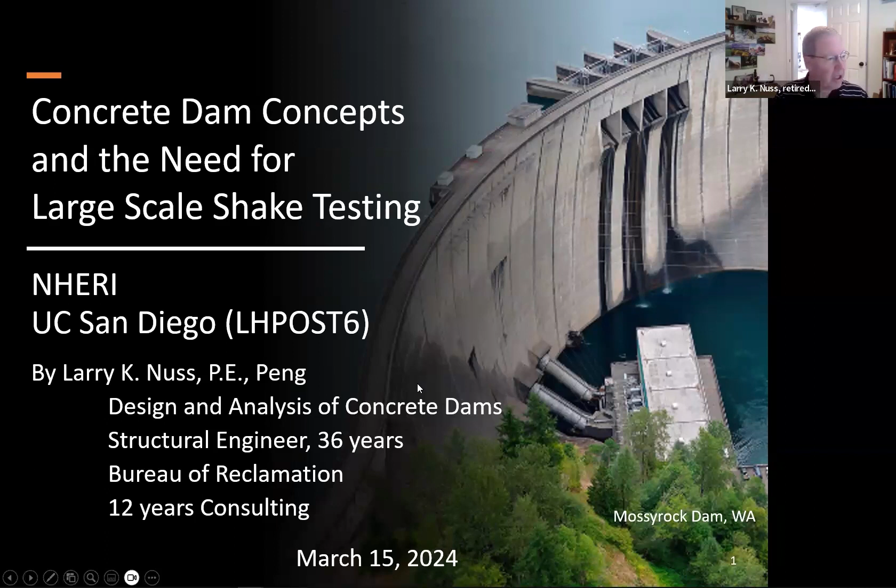You may not know this, but in the United States there's over 84,000 dams. There are about 3,771 federal dams and almost 45,000 private dams. The issue with seismic analysis of dams is that the downstream consequences could be enormous from the failure of a concrete dam. I'll show some failures that have occurred early in the last century.

But concrete dams have failed, but not from earthquake shaking. They failed from flooding, from overtopping, from landslides, and it's mainly due to failures in the foundation. So we have not experienced a seismic failure of a concrete dam. The Shih-Kang Dam in Taiwan was damaged pretty bad, and I'll show you a picture of that.

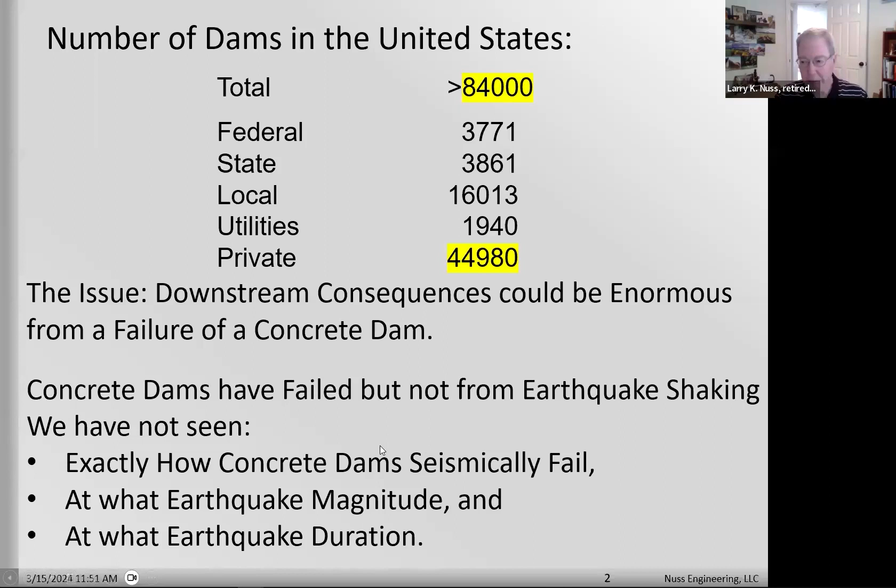But from purely seismic shaking, a concrete dam has not failed. So we don't know exactly. We've analyzed and done computer modeling of concrete dams, and we're basing a lot of our assumptions on analysis. But the reason we'd like to do a large scale test is to actually physically see a concrete dam fail. We've done small, like 3-foot high models, which I'll show some videos of, but nothing of any size. We'd like to see what earthquake magnitude they might fail at, and the duration.

Some of the subduction zone earthquakes are quite long. Concrete dams come in all different shapes and sizes, but there are 3 basic types: gravity dams, arch dams, and buttress dams. And I'll show you those.

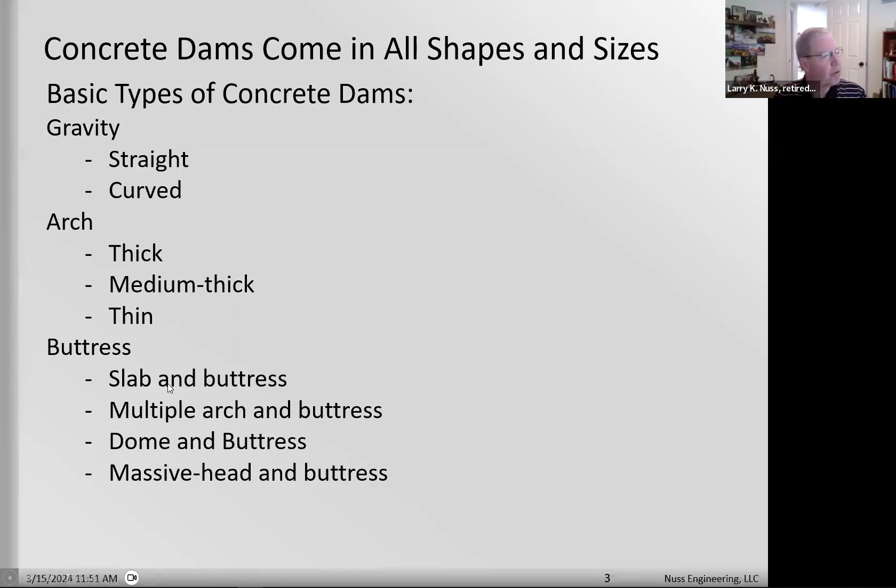So here's at the Bureau of Reclamation. Reclamation has 385 dams in the Western United States, about 90 of those are concrete dams. Reclamation is noted for having some of the largest in the world. Hoover Dam was built by the Bureau of Reclamation in the 1930s. It's 726 feet tall, so it's almost the height of a 72-story building.

You can see it's massive, and if you've ever been out there, it's worth the trip to go see Hoover Dam. Then there's Glen Canyon upstream from Hoover, which is 710 feet high. Here's Morrow Point Dam in Colorado, quite thin and narrow. And then look at East Canyon Dam, pencil thin, and it's 260 feet high.

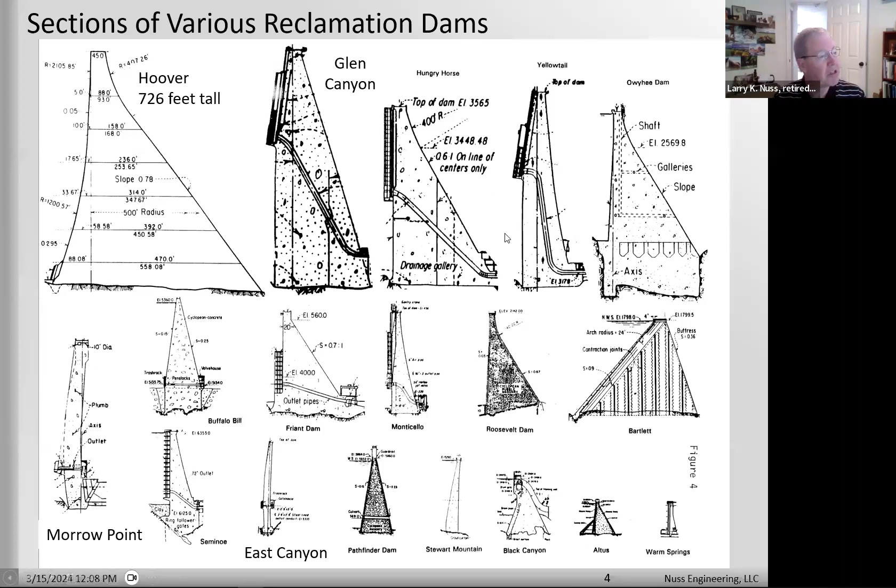So why are some dams very thick and some dams very narrow? We'll show you why. The main reason is the type, and a lot of it depends on the curvature of the dam.

Here's Hoover Dam right in the middle. It's curved, and so it develops a lot of its stability from just the curvature, like an eggshell. Then here's Friant Dam near Fresno, California. It's a straight dam across the canyon.

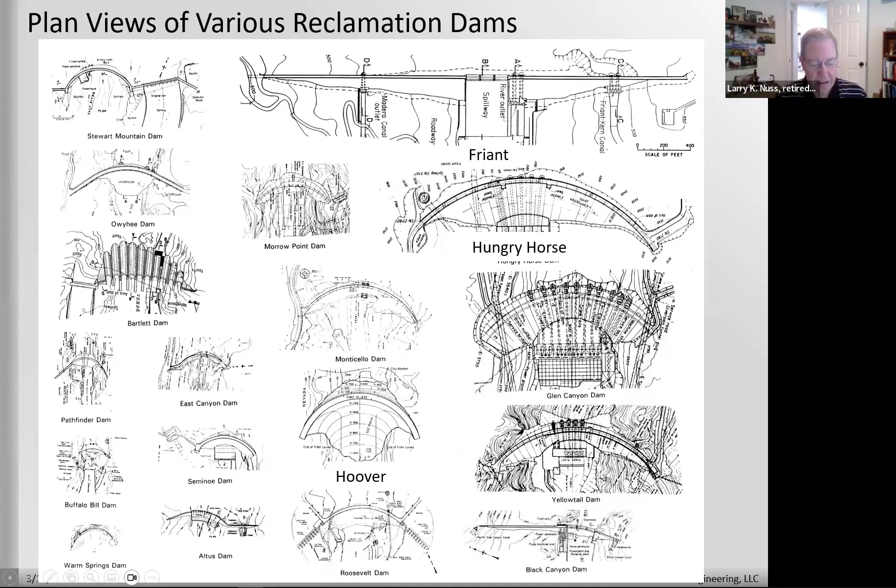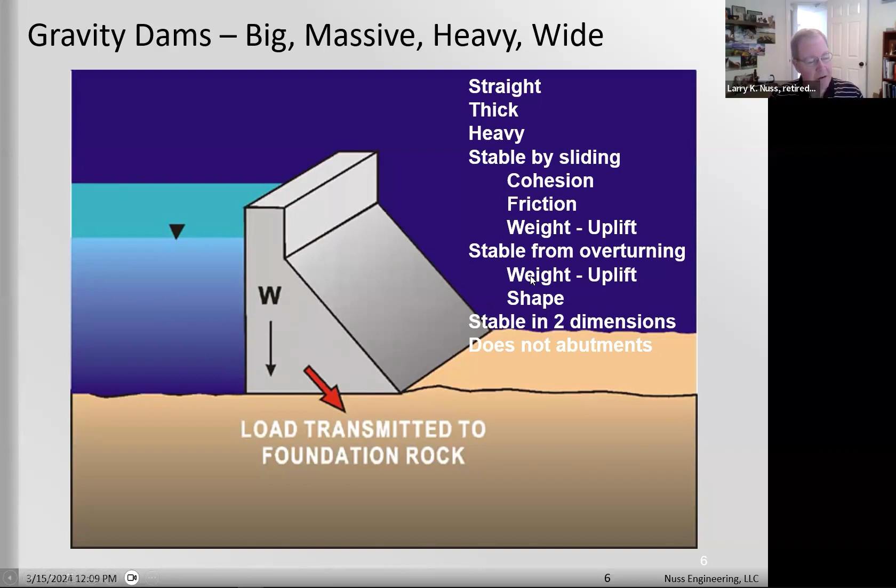Gravity dams can be straight across the canyon, and they're held there by their sheer weight. They're big, massive, heavy, wide, and just the weight of the structure makes it stable. You can think of the reservoir load as a triangle trying to push the dam downstream, and the weight of the dam, the concrete, is holding it in place. The forces from the reservoir are sliding it along the base and pushing it downstream. One thing about a gravity dam is they can be straight across the canyon, and they can be very, very wide.

Here's some pictures of a couple of gravity dams. Here's Grand Coulee Dam in Washington, almost a mile long. You can see it's stable—it's not getting any help from the abutments. It's so long, and it's just being held there by its weight.

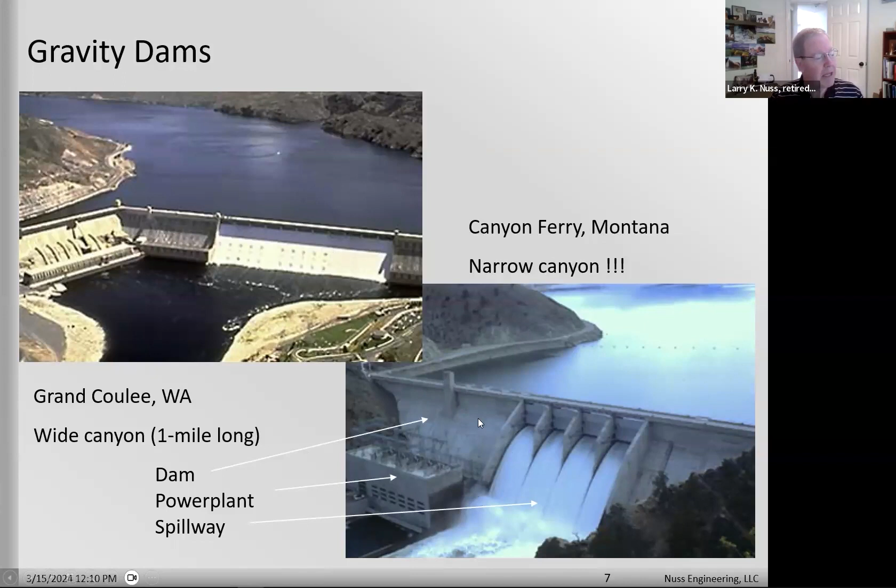Here's Canyon Ferry Dam in Montana. It's a gravity dam, straight across the canyon, also held there by its weight. It's in a narrow canyon, so it does develop some 3-dimensional beam action, but basically it's stable because of its weight.

Then there's buttress dams. There was a period of time when materials were hard to get, concrete or cement was hard to get, maybe the aggregates for concrete. So what designers did was narrow out, or hollow out, a gravity dam, and then to make it stable, since they're taking away a lot of weight...

The upstream face of the dam is sloped underneath the water, so you have all this weight of the water above the upstream face. That adds to the weight that's missing where they've taken it out. So buttress dams are stable because of their shape and their design, and they're very efficient because they're hollowed out.

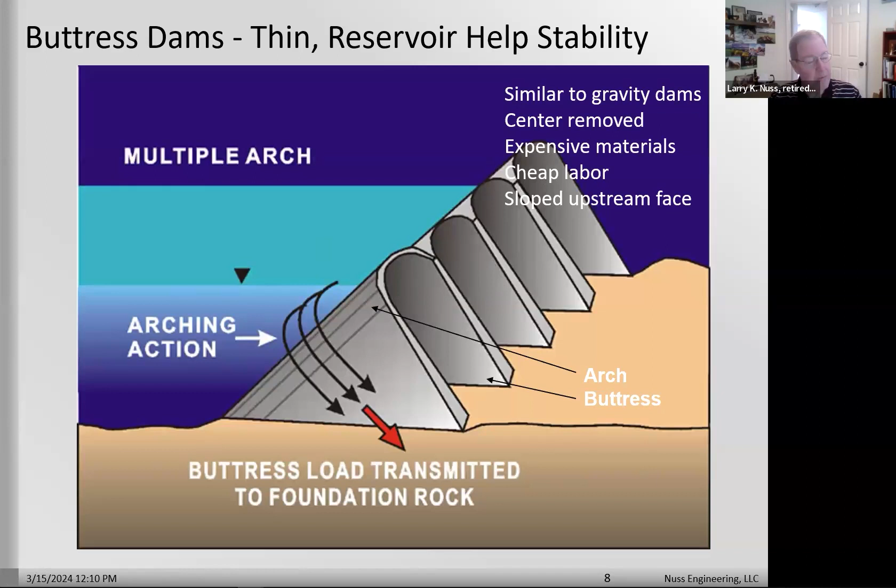One thing about buttress dams is you have to have reinforcement. So these are reinforced—gravity dams are not reinforced, and arch dams are not reinforced. Here's an example of some buttress dams.

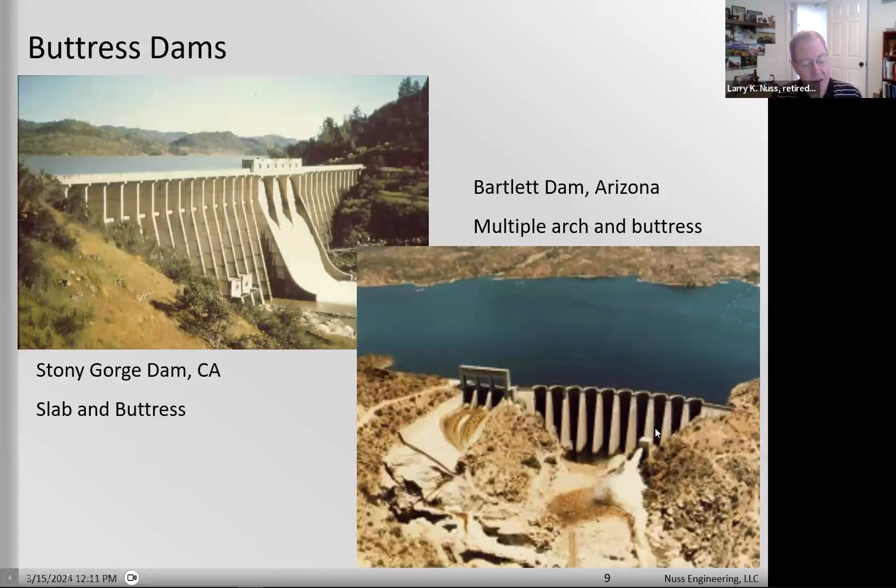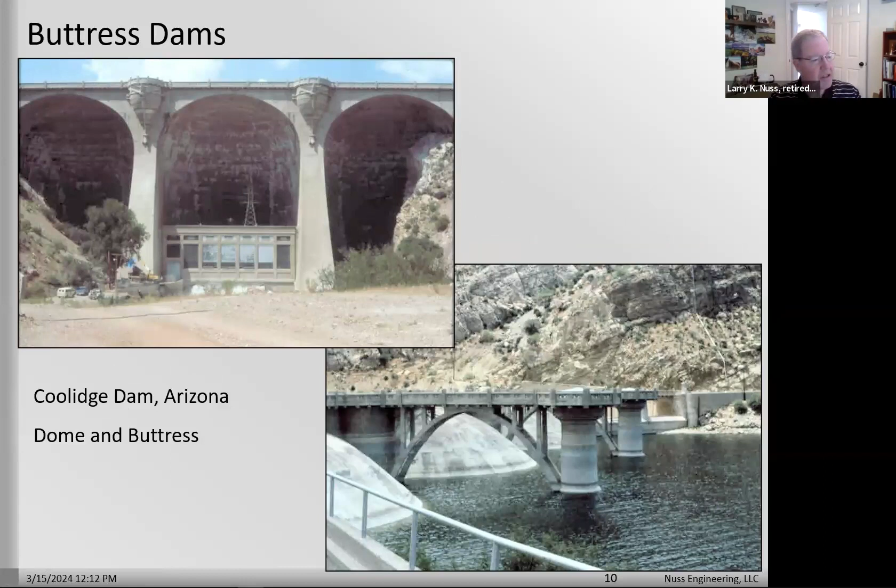And here's a buttress dam, Coolidge Dam in Arizona, and it has these three big domes, which are the upstream water barrier, and these domes carry the water load sideways into the buttresses. So there's a lot of different shapes and designs—there's no one standard concrete dam.

Then arch dams are thin, elegant, and carry the load very efficiently, with all the load going horizontally. It's like an eggshell—if you ever take an egg, put it in your hand without a ring on, and squeeze it, it's almost impossible to break just by squeezing, because shells are so efficient. Arch dams have to be in narrow canyons, and they have to have very strong rock abutments so the load can be transferred horizontally into the abutment.

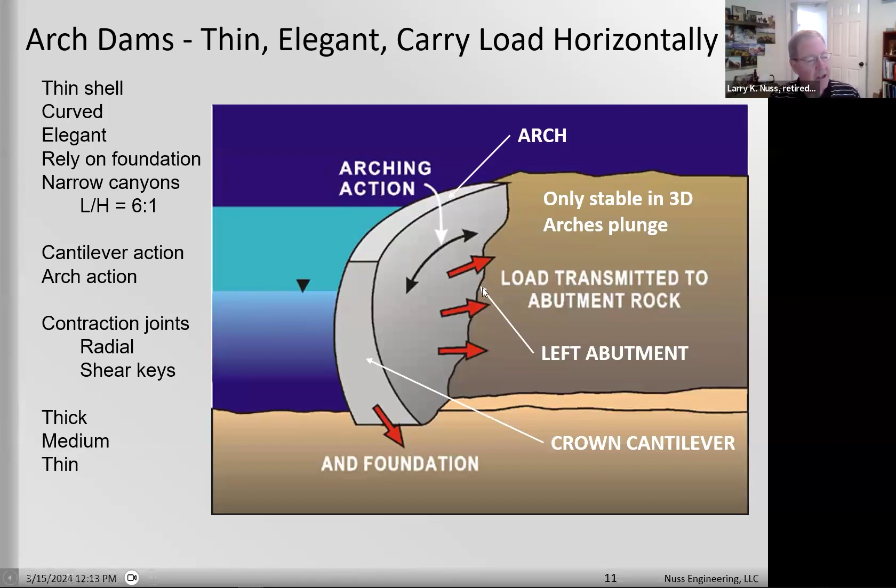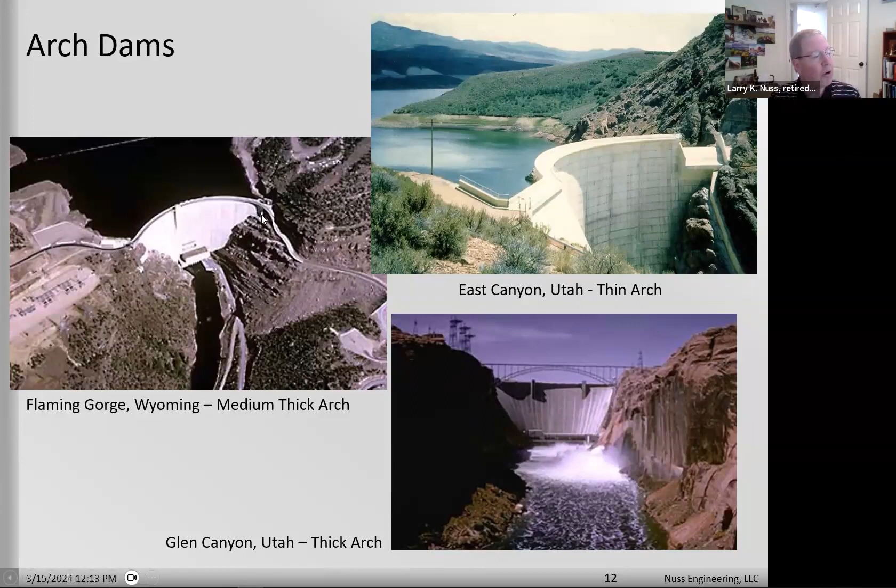And then here's Glen Canyon, 710 feet high. So you can see they're all in fairly narrow canyons, which is a requirement.

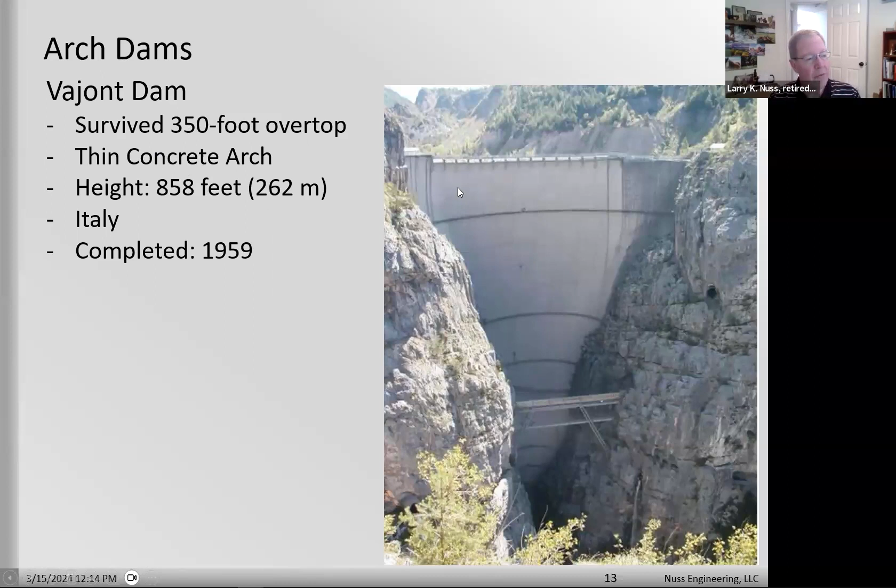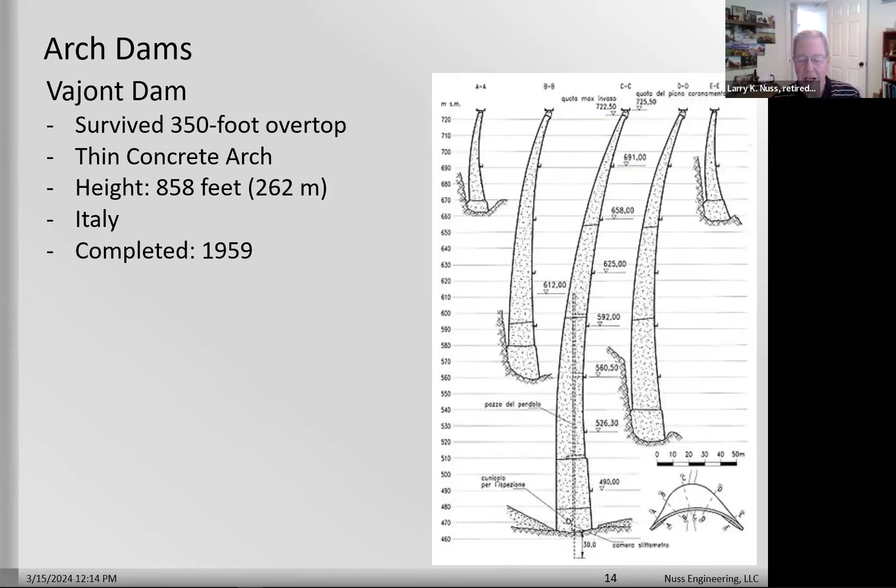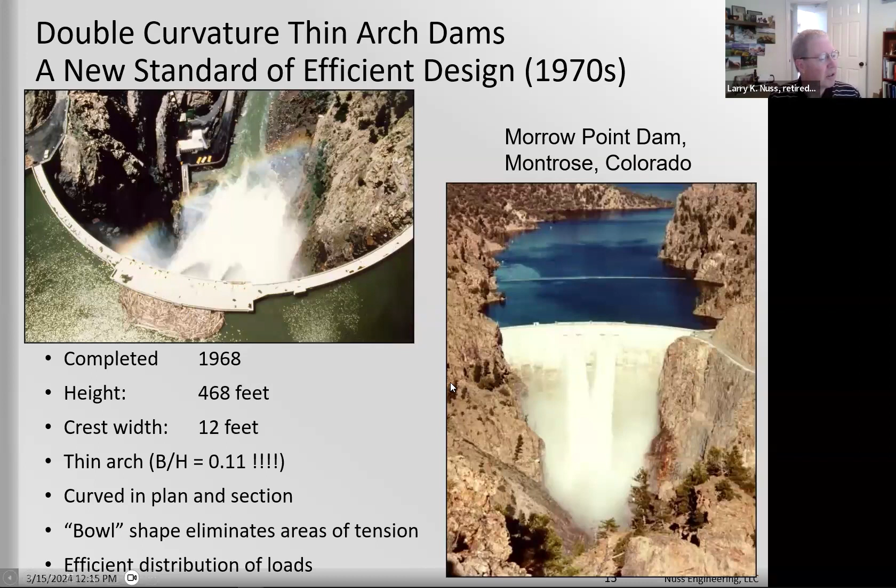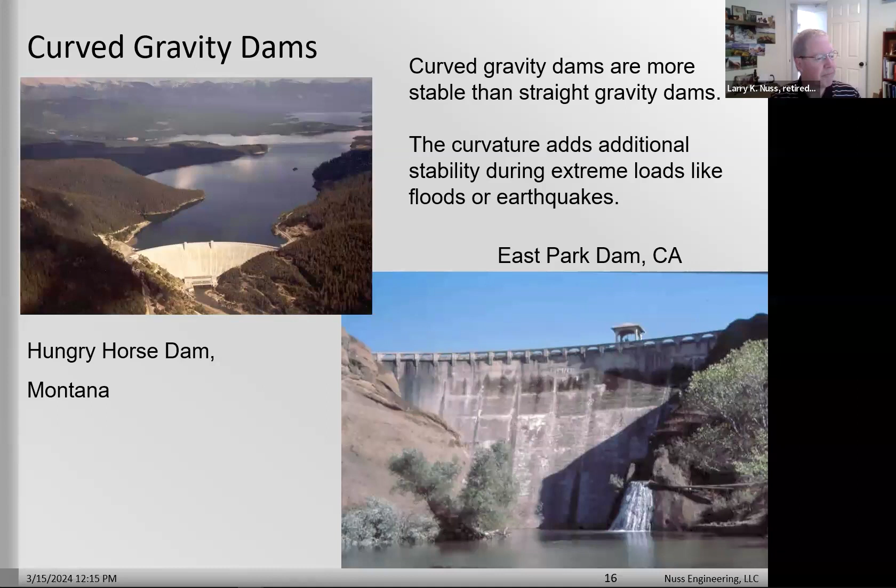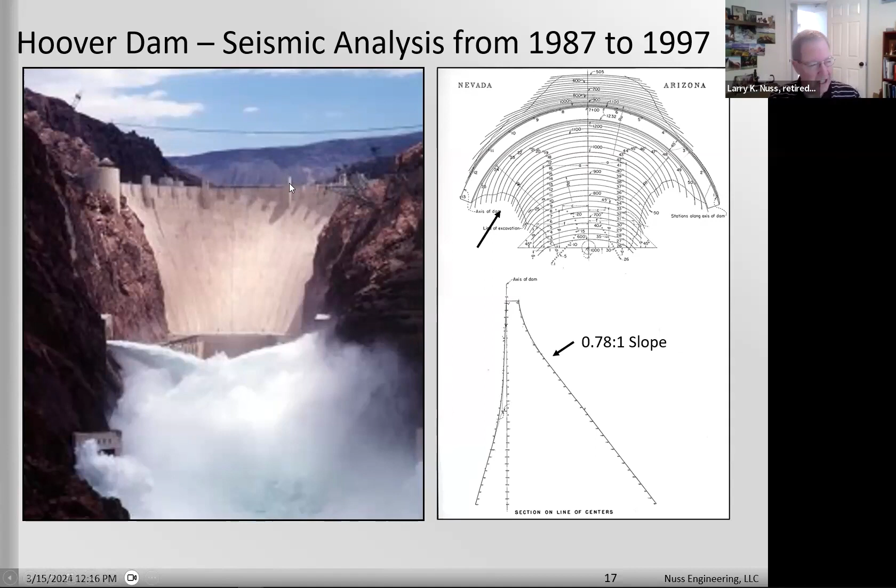Hoover's interesting. We reanalyzed that in the 1980s, and the peak ground acceleration at the base of Hoover, the Mead Slope fault is only about a half a mile away, and it generates about 0.6, 0.7 G at the base. And because this is so tall, the accelerations at the top of the dam are almost 3 G. So that means that if an earthquake hits, you're being pushed sideways at 3 times your weight. And the interesting thing is that these little towers on top of the dam are decorative, but they're also the men's and women's restrooms on top of the dam for the tourists that come to the site. So I said, well, if an earthquake hits at Hoover, you better not be up in those towers because there's going to be a lot of shaking up there.

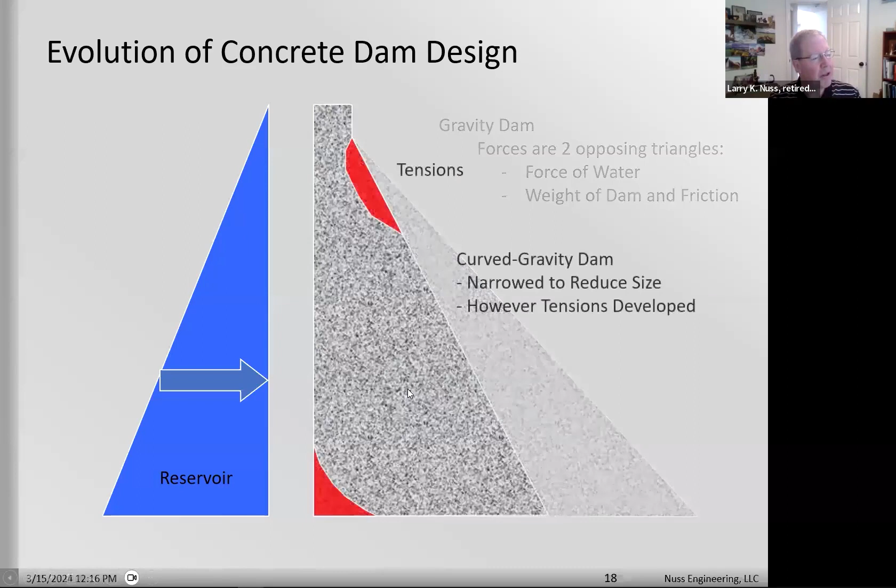So as concrete dams evolved, basically all concrete dams were gravity dams, heavy like this, and then they started making them thinner and curving them. And when you have a cantilever like this, you expect the dam to curve and to develop these red areas, which are tensions. You expect the tensions, just like in a cantilever, to bend over, but you don't expect the tensions on the downstream side of the dam. And they were getting cracking on the downstream side. Basically what was happening was the arches, when they curve the dam, you're carrying part of the load by the curvature and the arches in the dam. And so they were actually holding the top of the dam from deflecting, and they developed vertical tensions on the downstream face of the dam.

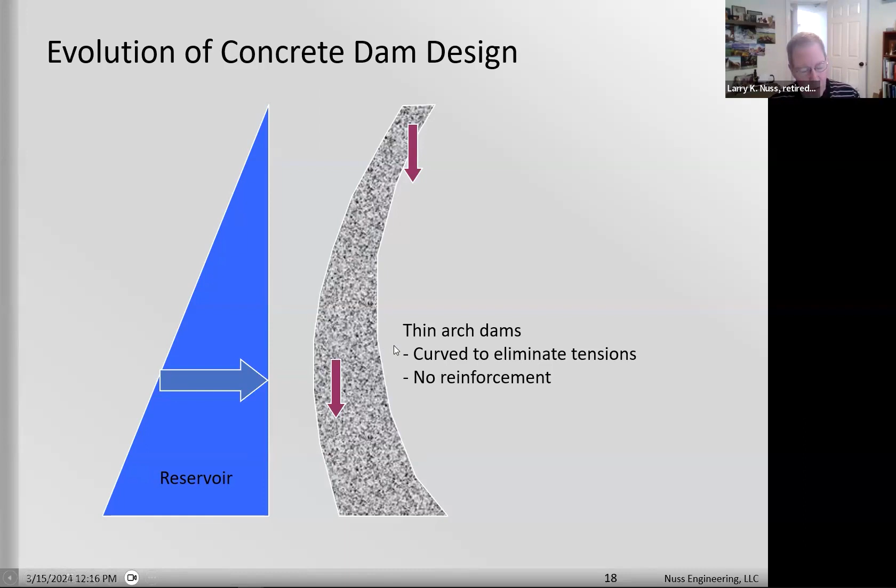So then what they did is, since there's no reinforcement in an arch dam, you shape the dam so that you create a counter moment, an upstream moment by the center of gravity on the bottom part of the dam, and so you get rid of the tensions at the upstream edge of the dam. Then you curve the dam downstream, so you develop this weight on the downstream side, and you develop a moment going downstream, and you get rid of those tensions on the downstream side. So it's quite an art to shape an arch dam, and what you're trying to do is get rid of the tensions, because you want the geometry to carry the load. You don't want to have to put in reinforcement in the dam, because they're so big and massive, it takes way too much reinforcement to make it stable.

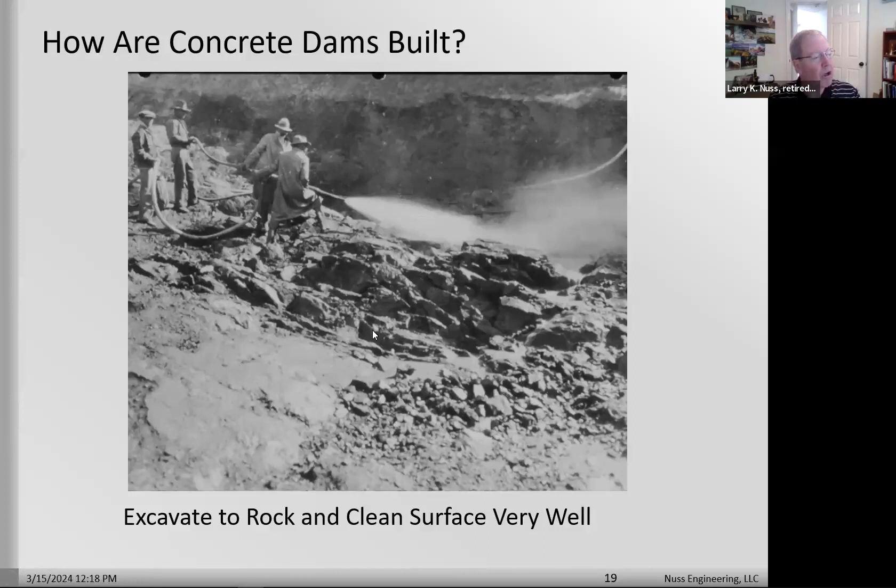In the early 1900s, they would build concrete dams out of big rocks, since cement was hard to get. They'd put these big rocks in the middle of the concrete dam, then just push cement in between all the rocks. Those are called cyclopean masonry, and that's the way older dams are built.

As things evolved, they started using mass concrete in concrete dams, putting big aggregate or big rocks in the concrete mix. If you've ever seen the sidewalk out in front of your house being placed, the aggregates in that are quite small, maybe half an inch or an inch. Here we have 6 inch diameter aggregate in these big dams.

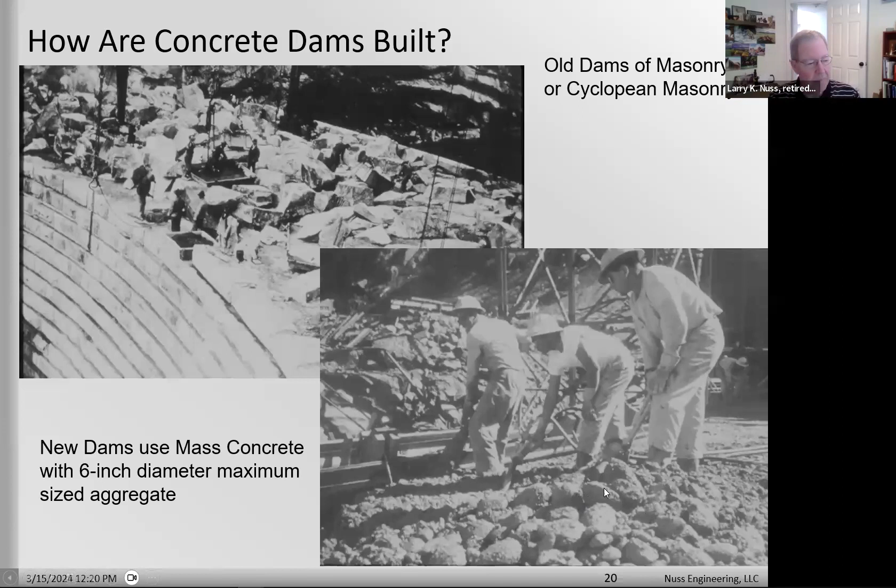You can't place the dam all at once. So what they do is build it in 50-foot by 50-foot blocks that are 5 foot high. That's just enough to be able to place within an eight-hour shift. They form up a 5 foot high block and then place concrete.

As you know, concrete develops heat when it hydrates. So when you build in these blocks, you're separated by gaps between sections called monoliths. Building in monoliths helps the concrete cool and not crack as it's cooling down. But to make the dam homogeneous and all one piece, they put shear keys in the joints between the monoliths. You can see they're quite zigzagged, and the intent is to interlock the blocks together so the dam acts as a unit.

But you don't want bond between these monoliths, because you have high temperature and low temperature in a dam, and it's going to contract, and you don't want cracks to form. So these are called contraction joints. They relieve the tensile stresses in the dam that are formed by thermal stresses.

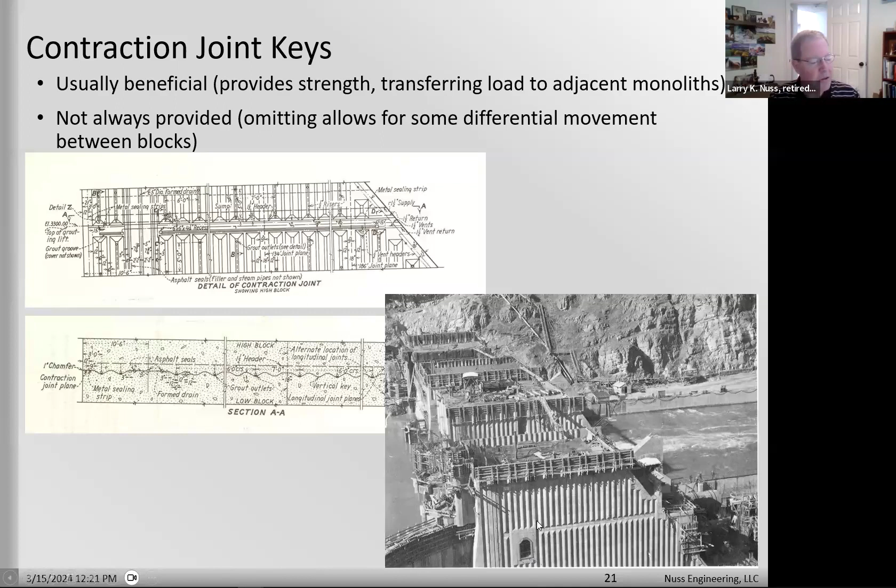Here's an arch dam being built. Here again are these 50-foot by 50-foot blocks. You can see the shear keys between the monoliths. It's built in high block and low block fashion, letting the temperature get out of the concrete as it hydrates.

It doesn't show on any of these photographs, but on top of each 5 foot lift, they put a coil of piping along the surface, and the next layer of concrete buries those pipes. They run cool water through these cooling coils, which takes heat out of the concrete, an additional way to keep the dam from cracking as it cools. And again, there's no reinforcement in an arch dam—all the tensions are reduced by the shape of the dam.

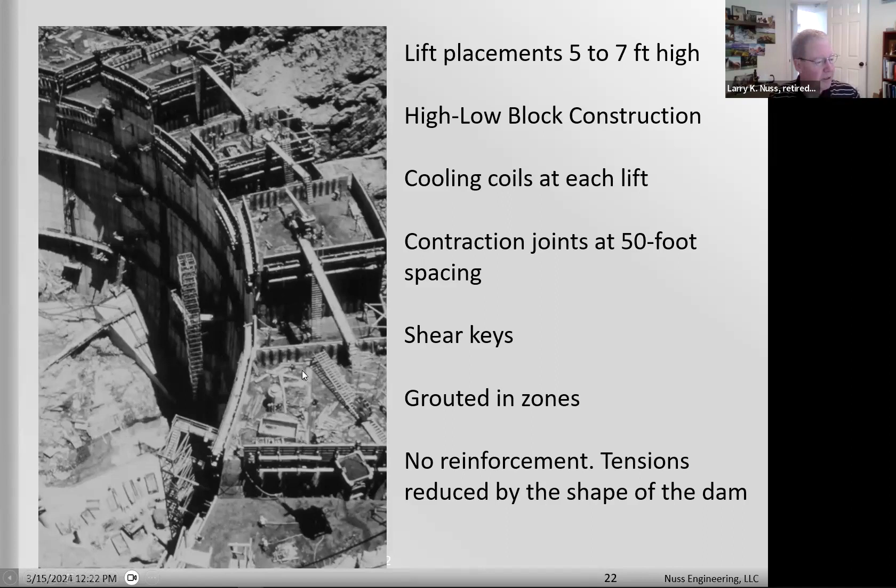Here's the East Canyon Dam I showed before, that 260-foot high thin arch dam. You can see the monolith—look how narrow that is, and it stays that narrow all the way down. It's only 7 foot thick at the top, and only 26 feet at the base. It's an incredibly thin dam.

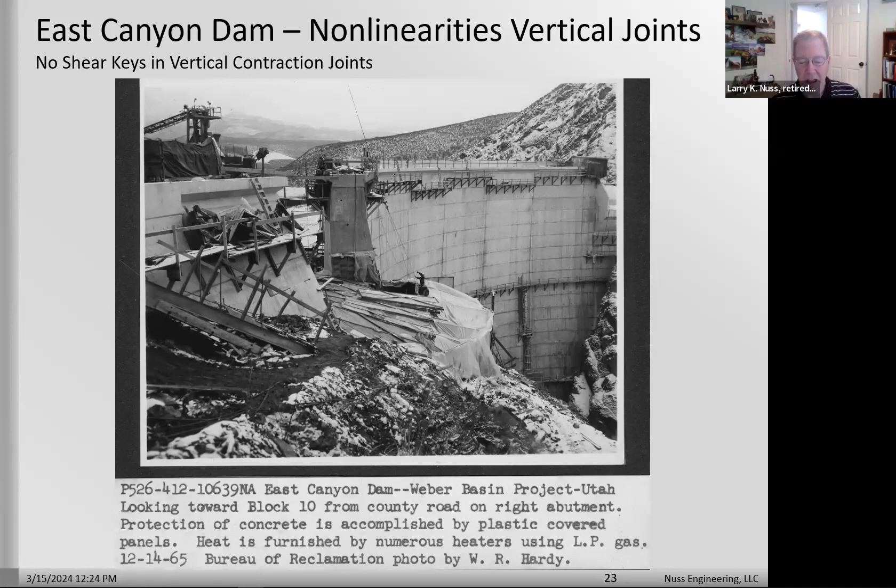So what we're trying to do in the dams industry is model these in the computer and run an earthquake through, looking at the stress patterns that get developed, predicting cracking and damage. It'd be nice to compare against something like a shake table test to compare against something physical that's happened. Then the modern way to make concrete dams is called roller compacted concrete.

Building an arch is pretty labor intensive, so the industry developed roller compacted concrete, where you build a concrete dam using methods like they use to build a highway. A truck brings very dry concrete that you place in one foot high layers, then a vibratory roller goes back and forth, vibrating the concrete and making it fluid, forming a solid mass of concrete. You end up with a solid, well-built dam.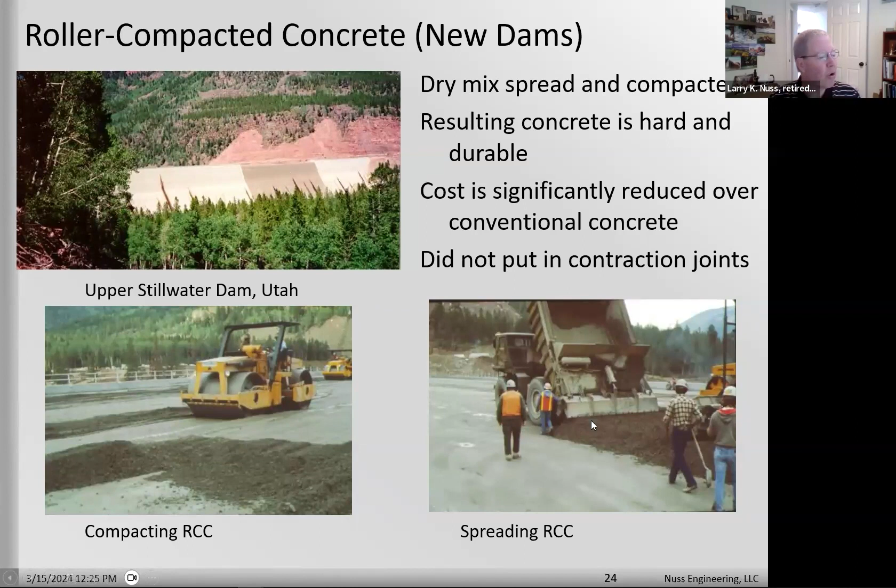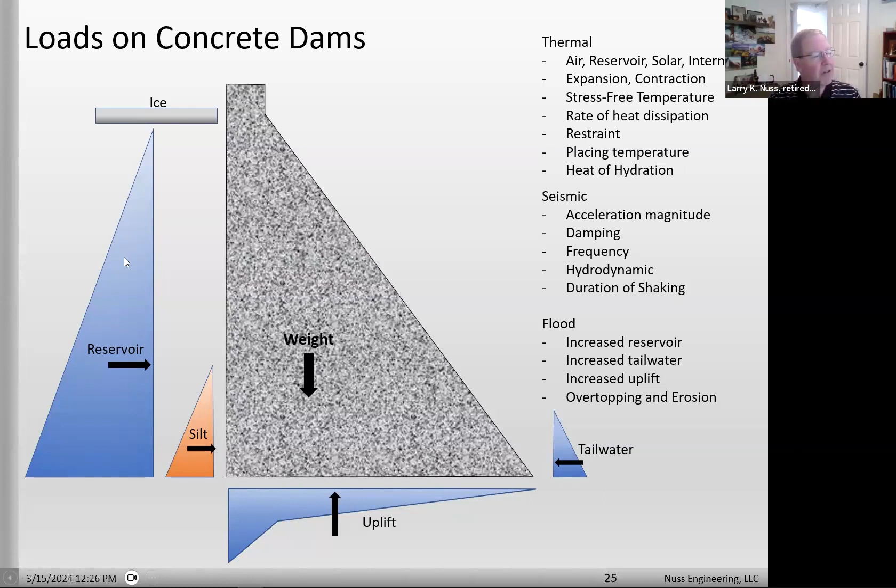The interesting thing about seismic is that when the earthquake hits, you have the inertia of the dam moving back and forth, but you also have the inertia of the reservoir water sloshing back and forth. That's called hydrodynamic interaction. Those two forces interact together, so if we do a large shake table test, we'd have to include the reservoir water in the test also.

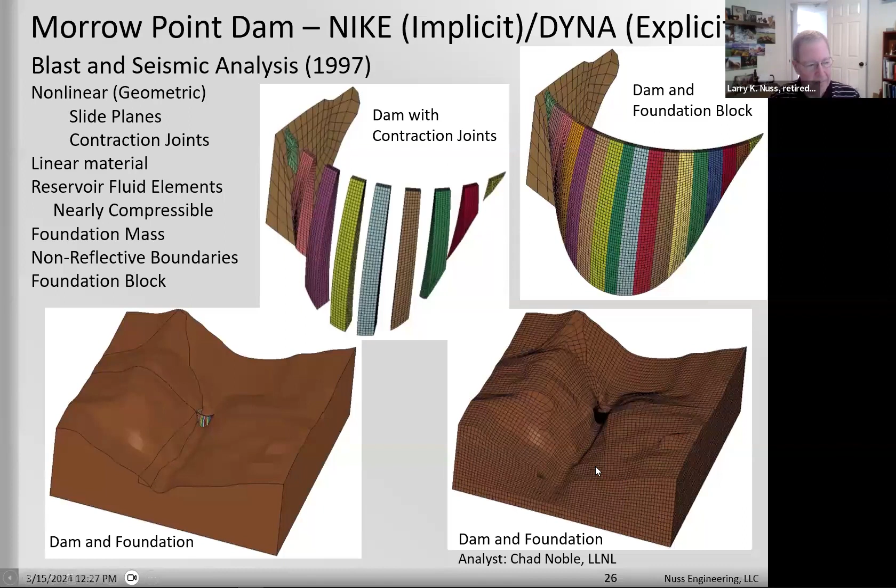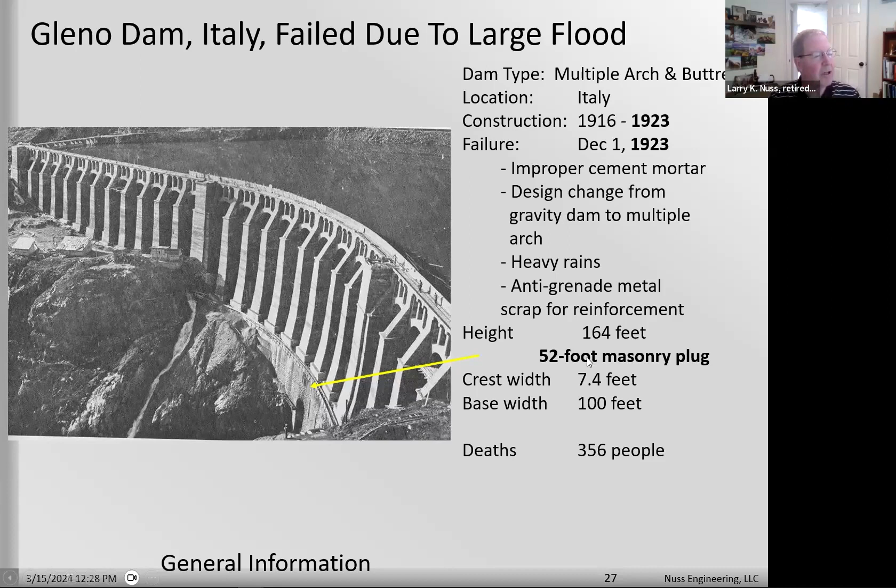Remember, I talked about how the consequences can be huge for a dam failure - 356 people lost their lives downstream when this failed. Here it shows the failure: the masonry just failed in shear. The masonry couldn't hold the shear stresses because it didn't have the weight. If it had been a gravity dam, it might have been fine, but this whole centerpiece collapsed.

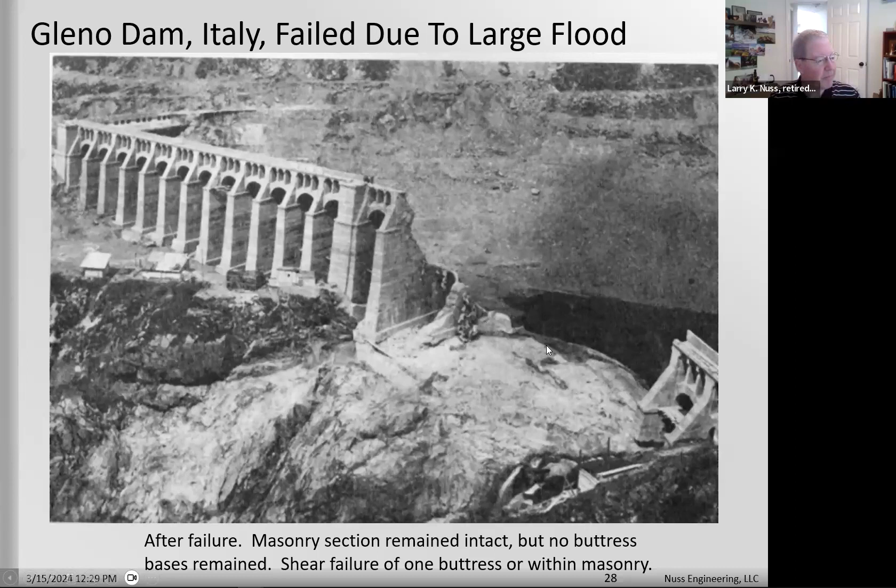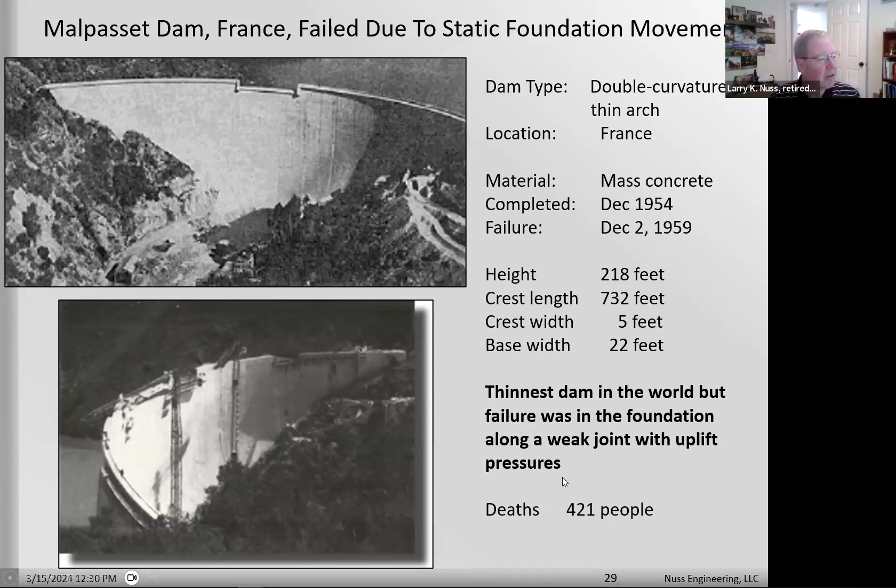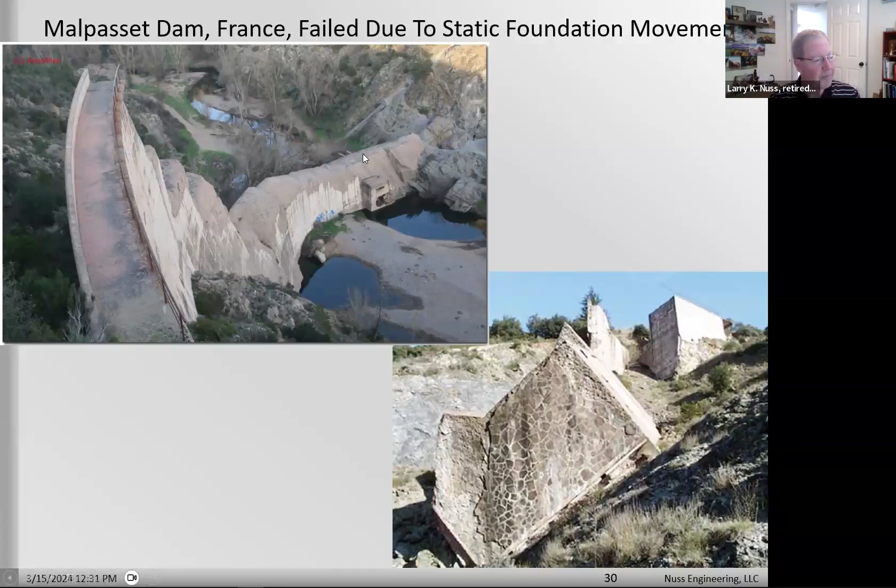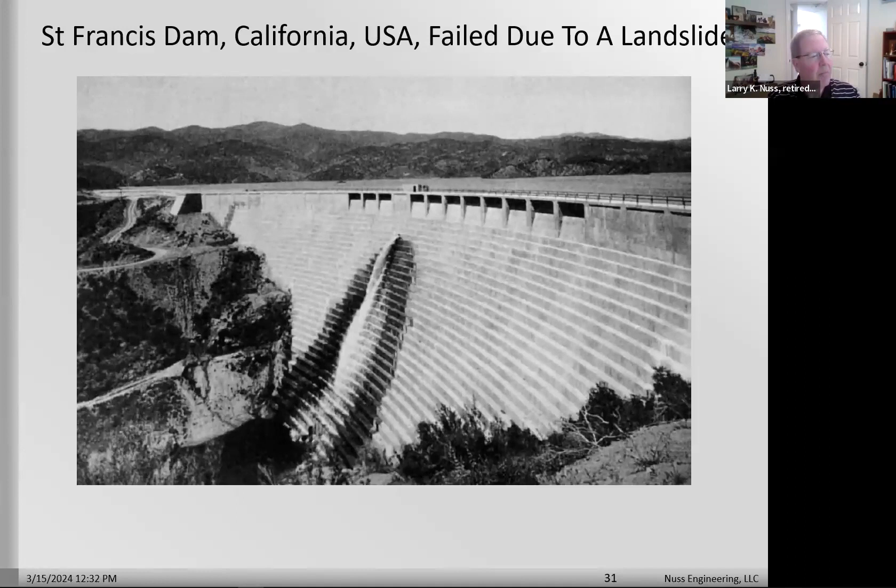Back when it was built in the 1920s, they did not have professional engineering licenses that people had to obtain to be a design engineer. The man that designed this dam, Mulholland, was a self-taught civil engineer. They built the dam, and he unknowingly built it on a landslide.

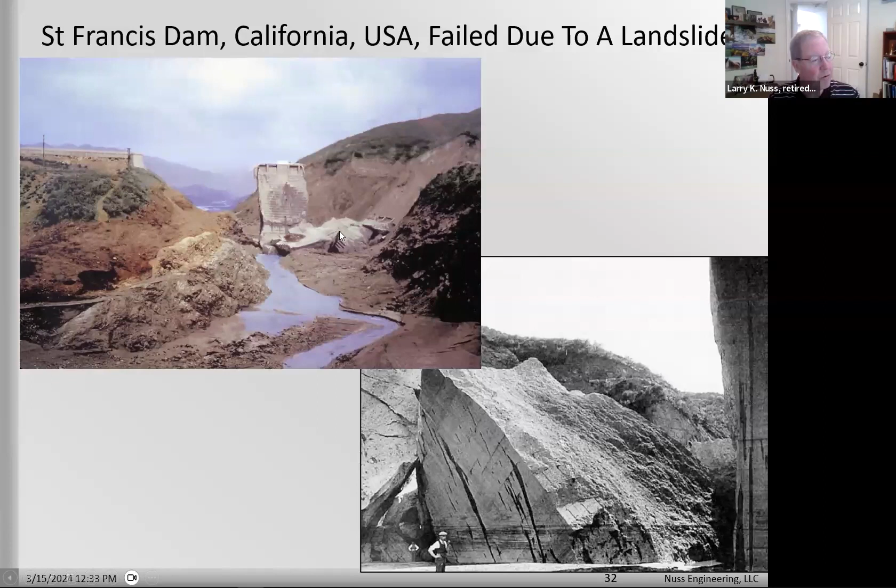So when they were filling the reservoir, the uplift pressures seeped into the foundation and made the toe of the landslide moist and wet, and unweighted the toe of the dam. This massive dam - look how it's built very solid, look at the size of these pieces - but when that landslide hit, it just took the dam for a ride, and again, it was the foundation.

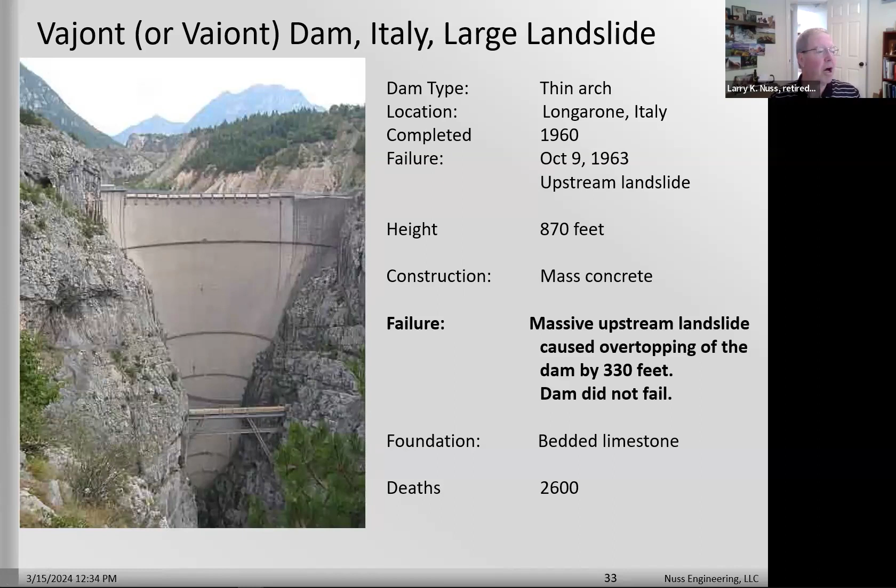Here's a Vajont Dam in Italy that I showed before, the extremely thin arch dam. It had a massive upstream landslide. The dam performed very well, but when this landslide occurred, 2,600 people lost their lives. And the sad thing is that the designers knew that there was a landslide upstream, but they didn't think the reservoir would do anything to the landslide.

Look what happened. So when they were filling the reservoir, the toe of the landslide was being uplifted by the moisture in the water, and this landslide - they hadn't even had it monitored. It started sliding, so they lowered the reservoir, and it stopped sliding.

And so the head geologist on the site said that it should be no problem - if we raise the reservoir a little bit and it starts sliding, we'll lower it. And if we raise it a little bit, we'll lower it, and then finally this landslide should stabilize. Well, they went through this cycle for about a year, and one evening they rose the reservoir and the landslide started sliding, and they lowered the reservoir, and the landslide did not stop sliding.

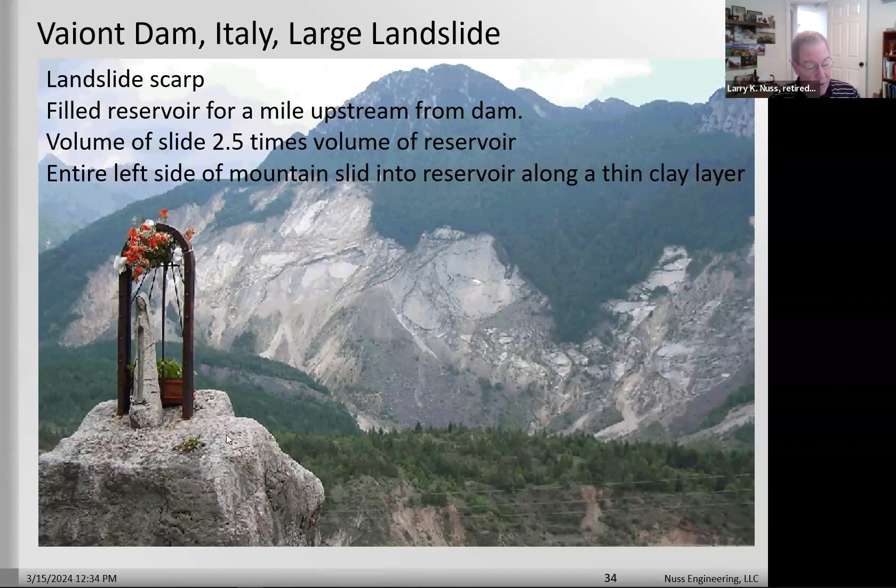You can see that the volume of this landslide is 2.5 times the volume of the reservoir. The landslide slid into the reservoir, the water sloshed up and destroyed a town on the opposite bank, and then it went over the dam with a 330-foot high wave. The dam was fine - the dam withheld that unbelievably.

But here's the town below, Longarone. Here it was before, and here it's after. So it can be devastating, the power of water behind a dam.

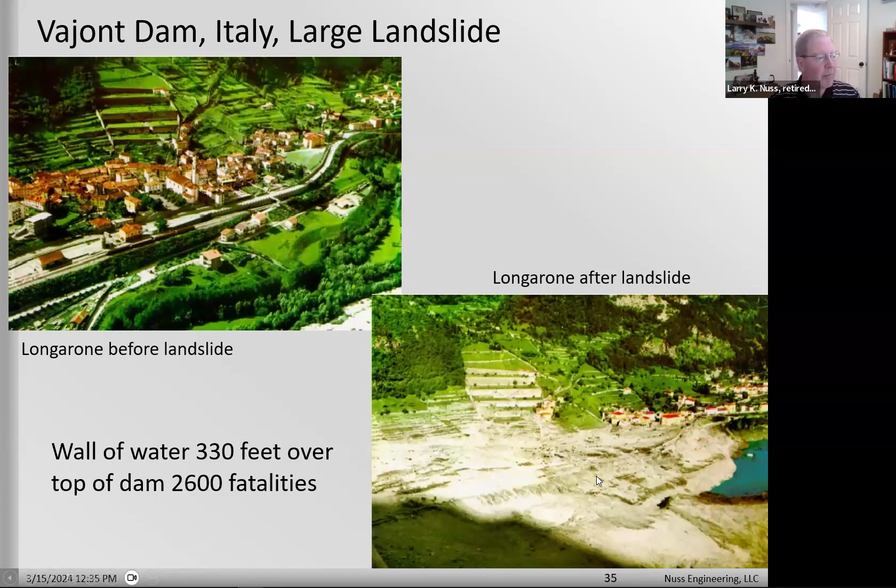So how have concrete dams performed in earthquakes? Actually, they've performed very well. There's been no earthquakes that have failed a dam, except one concrete dam that had a 30-foot displacement and caused a lot of damage. So I'll show you that.

Back in the 60s, people thought the natural frequency of a dam was such that it didn't match up with an earthquake, and that an earthquake really couldn't negatively impact a dam. But Koyna Dam in India was the first dam that was damaged by an earthquake.

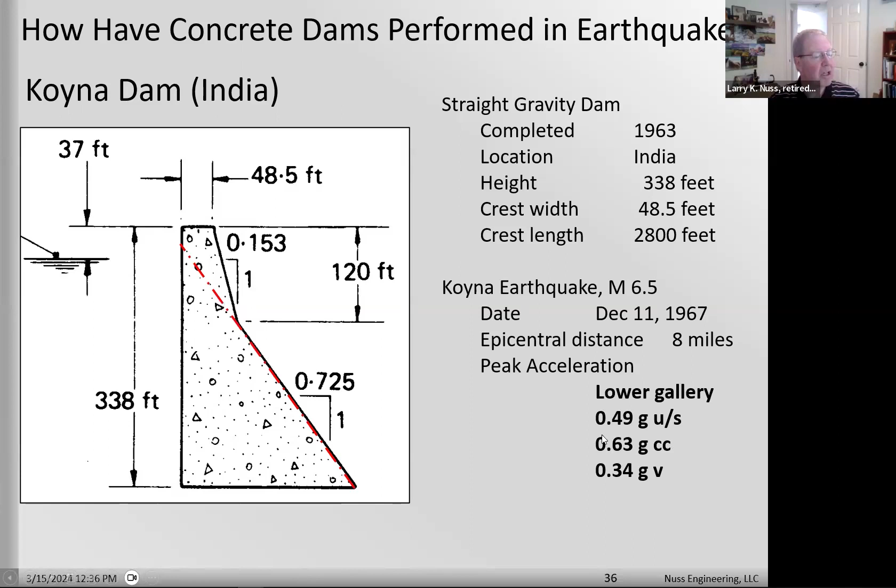Here's the shape, and we later know that it's not good to put changes in geometry in dams because they attract stress - it's a stress concentration point during an earthquake. So this dam was subject to a 0.63 ground motion, and it cracked right there - you can see it cracked right at that kink on both the downstream and upstream sides, and then it cracked all the way along here.

And so that started a lot of the earthquake engineering on dams, and people like Dr. Anil Chopra from Berkeley, Ray Clough, Penzien - all these great names in the dams industry - started because of Koyna Dam.

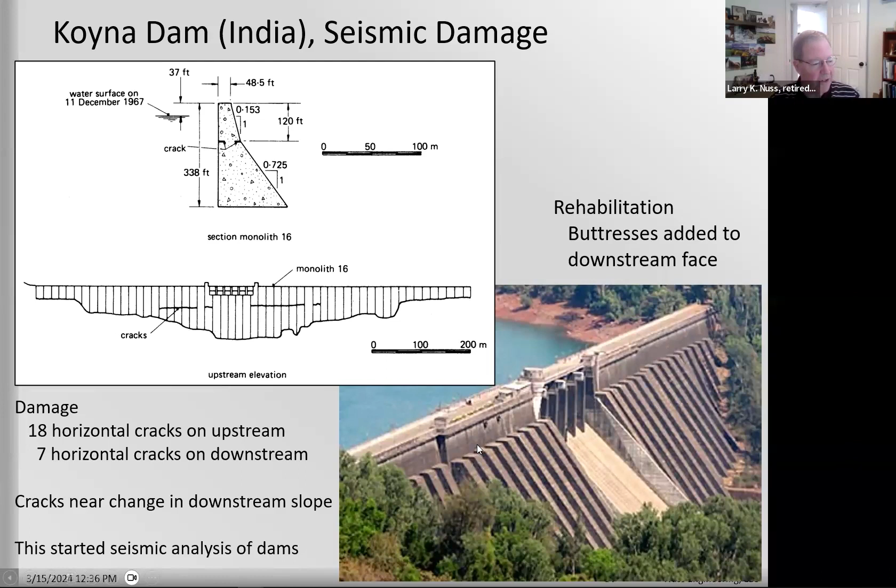The interesting thing is that they put these buttresses on the downstream side of the dam to stabilize the area above the crack. But I'm not sure how well this is going to perform seismically, because they built in a change in geometry right along the top of these buttresses. So if they get another earthquake there, it might develop cracks right at the top of these buttresses.

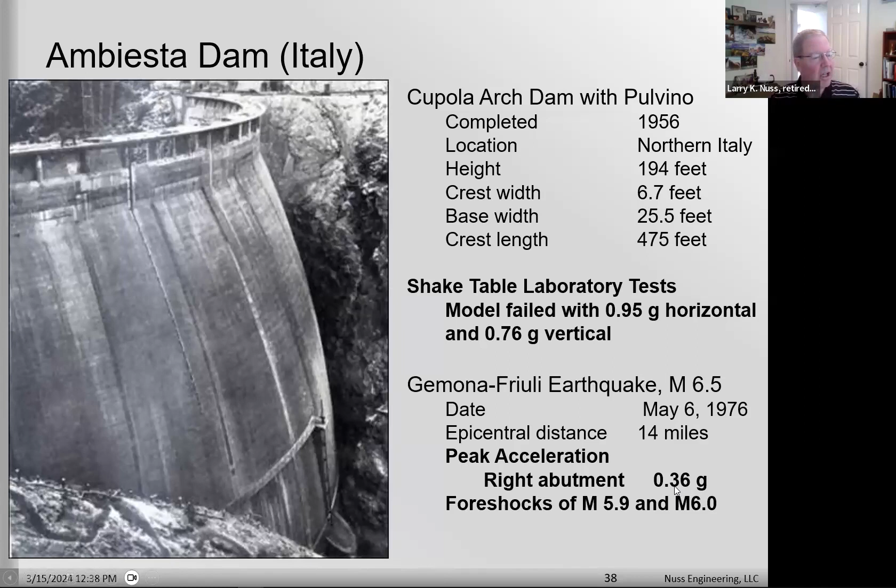And then actually, when they built the dam, it had an earthquake of 0.36 G, and it came out fine, no reported damage at all. So you see this a lot. A lot of concrete dams have been in substantial earthquakes but come through fine. But they've never been subjected to the maximum credible earthquake that the geology or seismology in the area could produce.

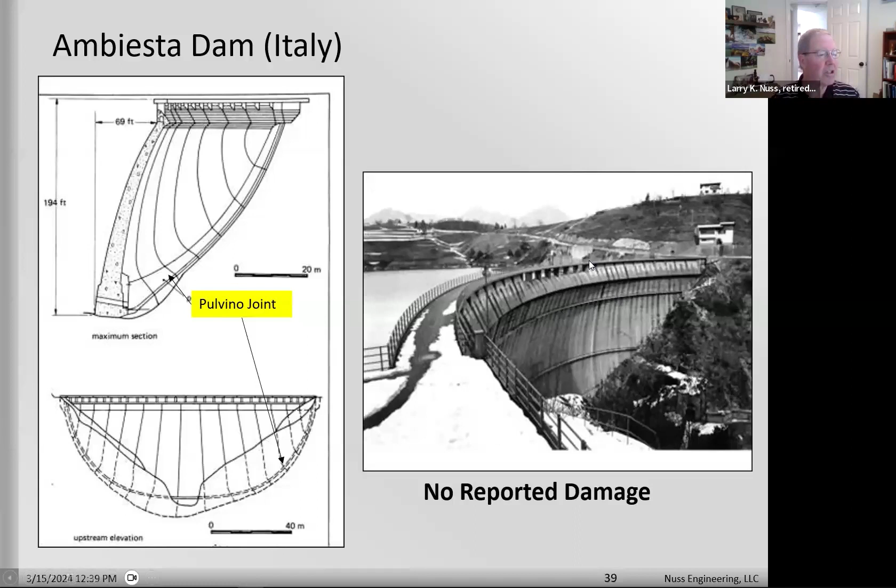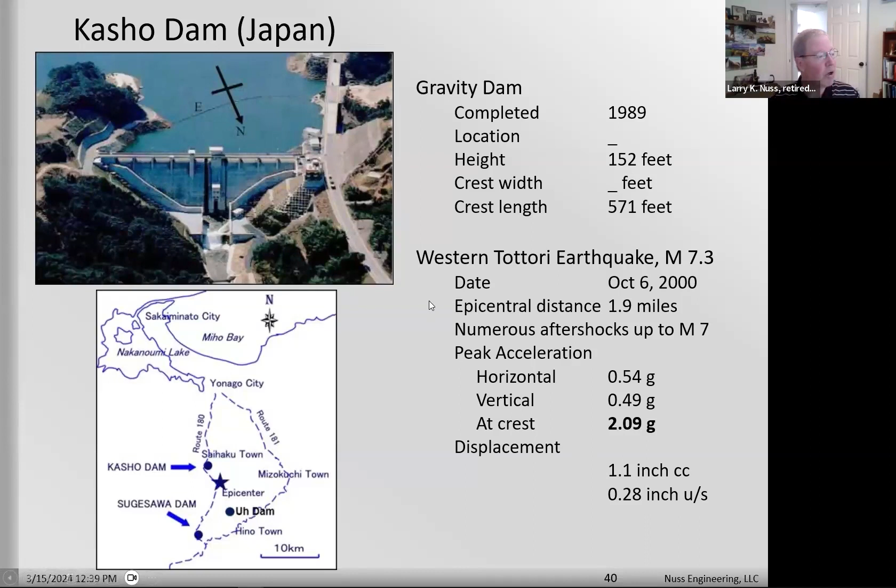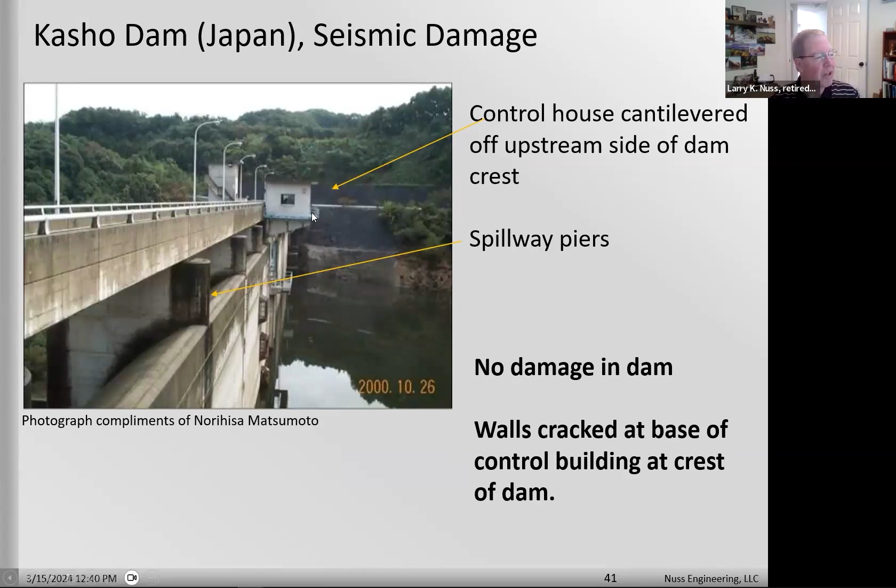Here's Kasho Dam in Japan. It's a gravity dam, straight across the canyon. It had an earthquake, and they measured 2G at the crest. They had over an inch displacement on one abutment. This dam came through fine, no damage to the main dam. The piers were fine, and the only damage was cracks in this control building on the upstream side. You can imagine it would be shaken pretty well, but it just cracked.

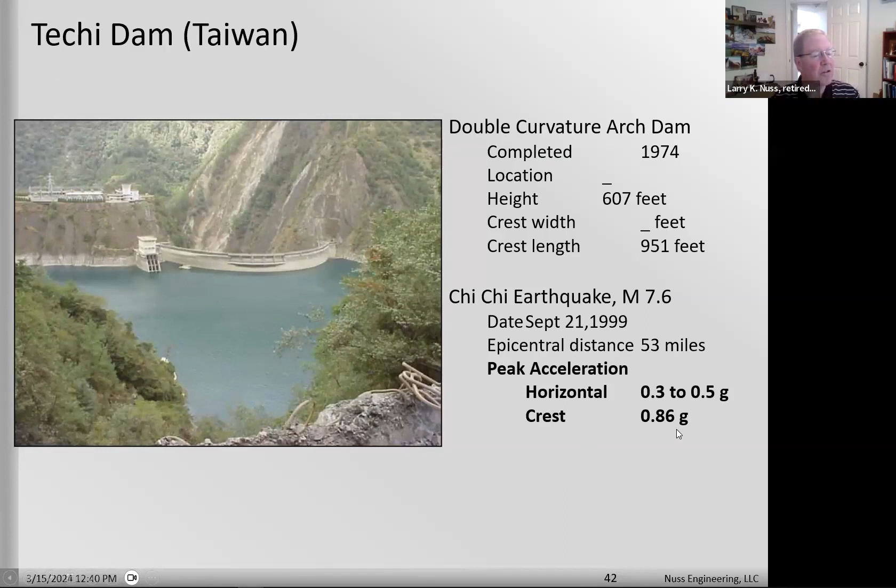Here's Techi Dam in Taiwan, an arch dam. They measured 0.86 G at the crest right here, where they had an instrument on this spillway in the center. It has very little damage, no major cracking in the main body of the dam. All they found was some spalling at a parapet wall on top of the dam, and minor displacement between the two monoliths where a vertical contraction joint divided them. That's pretty minor damage for 0.86 G measured at the top of the dam.

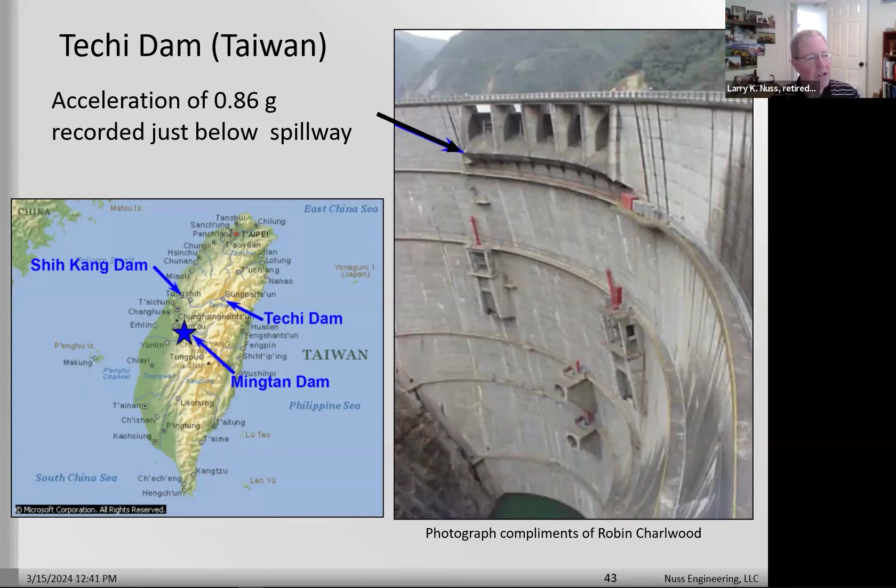Now I might mention that when an earthquake hits a concrete dam, you have a certain ground acceleration at the base of the dam, and the motions amplify as you go up the dam. So depending on the height of the dam, the accelerations at the top can be 2, 3, 4 times the acceleration at the base.

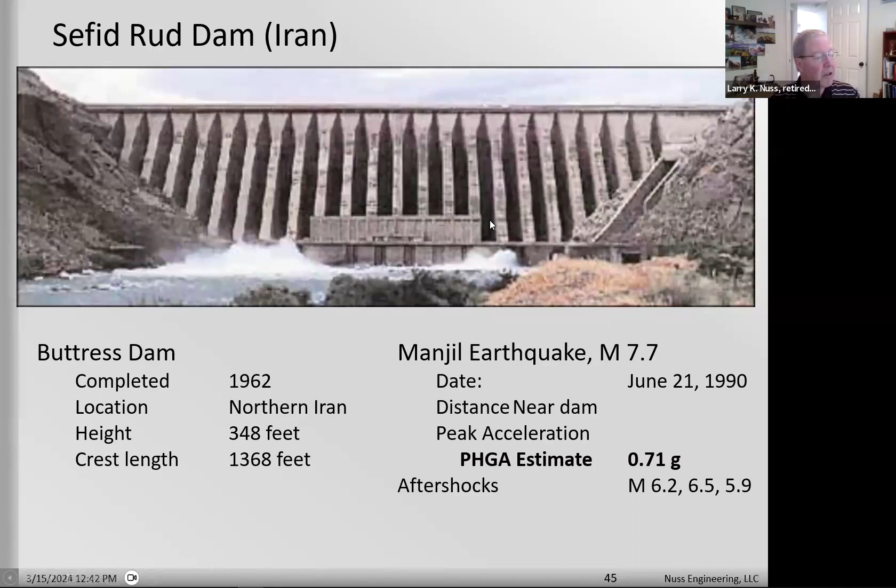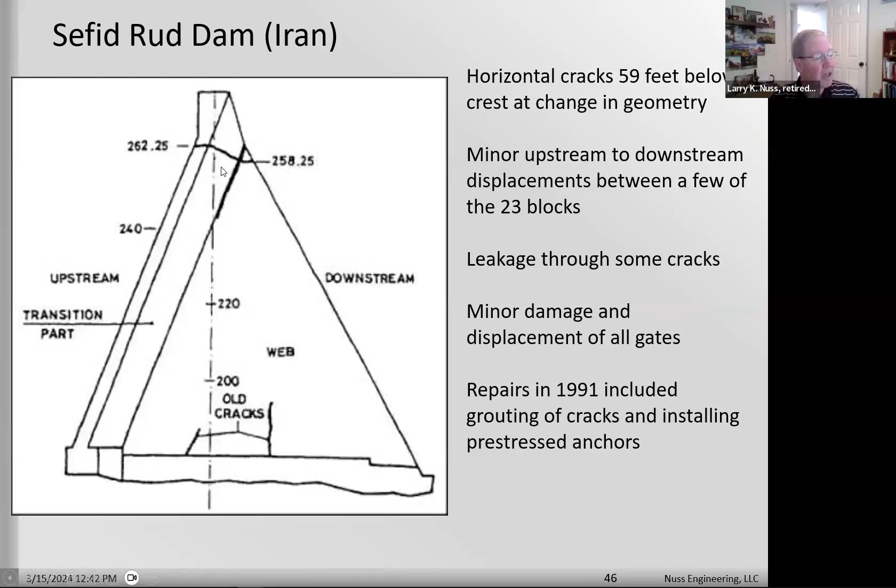Here's Sefid Rud Dam in Iran. It wasn't measured, but they estimated the peak horizontal ground acceleration to be 0.71 G, and again this is a buttress dam. It actually cracked, it didn't fail. This top piece didn't slide off or anything, it cracked. They had cracking at the top of the dam, some leakage through these cracks, and they repaired the cracks and put post-tension anchors in, and the dam operates today. So it performed very well.

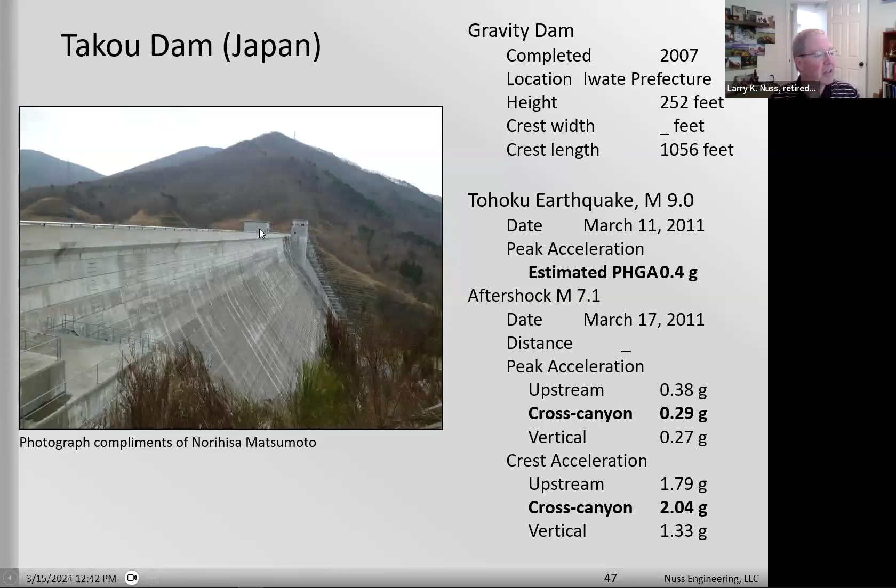So what happened here? You can see this tower, this elevator tower and a building. This building was damaged, you can see the cracking that happened. There are small offsets in the parapet wall, but basically no damage to the main part of the dam. Even at 2 G, this building came through fairly well. Normally these buildings are reinforced - the dam itself is not reinforced, but normally these buildings or parapet walls are.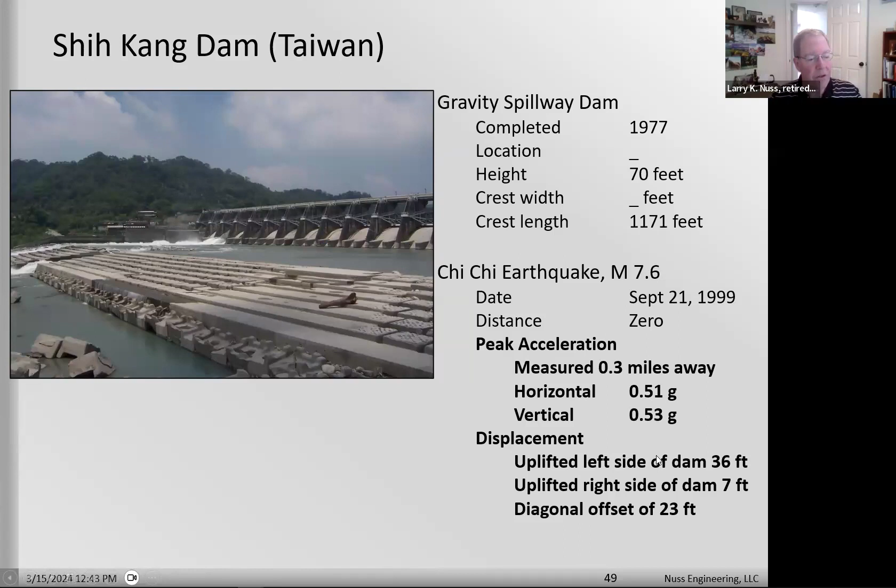So this is what happened - if you have a fault going through the gravity dam, you can have tremendous damage. But the interesting thing is, a lot of these piers were cracked and had to be replaced, yet they didn't fall downstream. It didn't release the reservoir simultaneously with everything going downstream - these kind of collapsed and fell on one another, so the flow out of the spillway gates was much less than if they'd opened the gates. There was no flooding, and the dam actually performed away from this area pretty well.

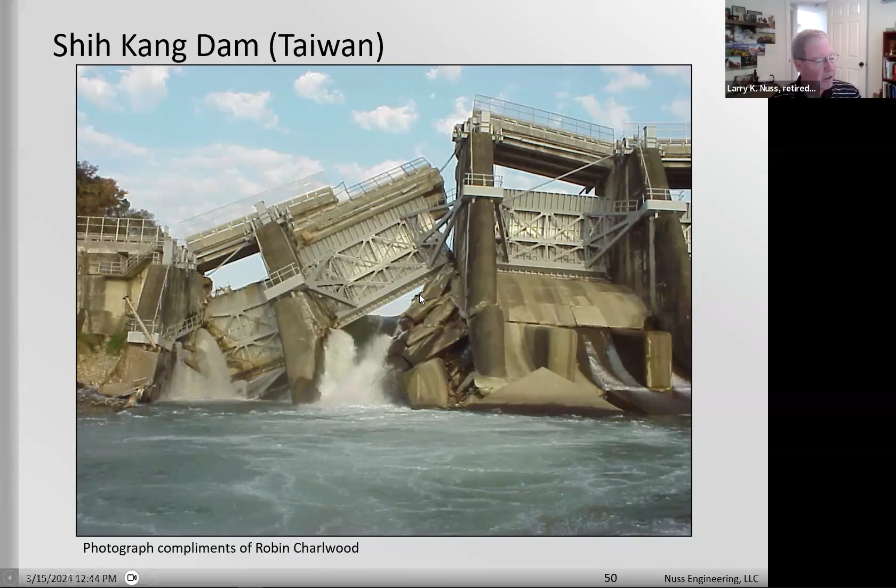And in this area, it didn't collapse through. You can see here the original height of the dam, and here on the other side of the fault, look at the damage that occurred. So yes, if you have a fault and offset in a dam, there can be tremendous damage.

But this is the only case where a concrete dam has been damaged this severely.

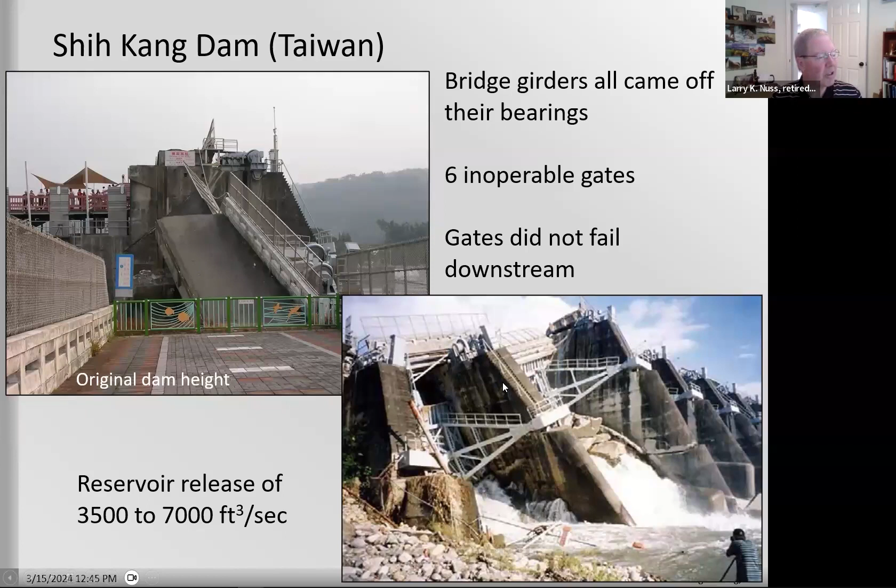So why do we need large-scale testing? Well, because in the dams industry, just like any other civil engineering field, we're predicting probabilities of failure for different loading conditions. This helps prioritize work on different projects, assess risk to downstream populations, and determine if dams are safe. Because the downstream consequences can be so enormous, we want to get a good handle on the response of a concrete dam to an earthquake.

We think we have a pretty good feel because we've done all sorts of finite element analysis, seismic analysis of all the concrete dams. But it would be nice to validate the studies against actual tests.

So the one thing that's difficult is small scale testing. It's hard to get the similitude of all the different pieces of the test correct. You have the concrete density, the modulus, the compression, the tensile strength of the concrete. You have the foundation rock and its properties, and the dam-to-foundation interaction.

It's good, if you're going to look at the failure of a concrete dam, to get the failure and cracking of the concrete correct. There have been small scale shake table tests done, but they never used actual concrete for the model dam material. The Chinese did some shake table tests with rubber dams, or plaster filled with lead, trying to get the similitude right, but it just wasn't concrete. It didn't fail like concrete. So it'd be nice to get that right.

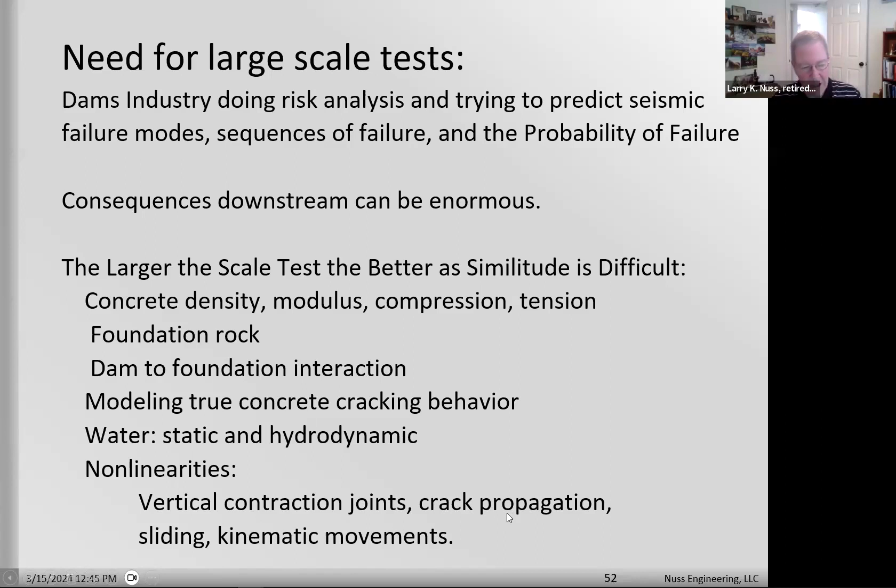So at the Bureau of Reclamation, we have a shake table. It's not nearly as big as the LHPOST, and it's just a single degree of freedom, just with a sine wave. I'll show some videos. We had a 3-foot high arch dam that we put on the shake table, and that actually gave us a feel for how an arch dam might fail.

And then the Corps of Engineers did some small scale tests. There were 9-foot high 2D gravity dams modeling Koyna Dam, the first dam in India that cracked. But the same thing, their shake table is a one-direction sine wave.

We did do an outdoor blast test of a 3D arch dam model down in Fort Polk, Louisiana. Homeland Security wanted to know what blasting could do to a concrete dam. So we did a 15-foot high arch dam model and had explosives in the reservoir.

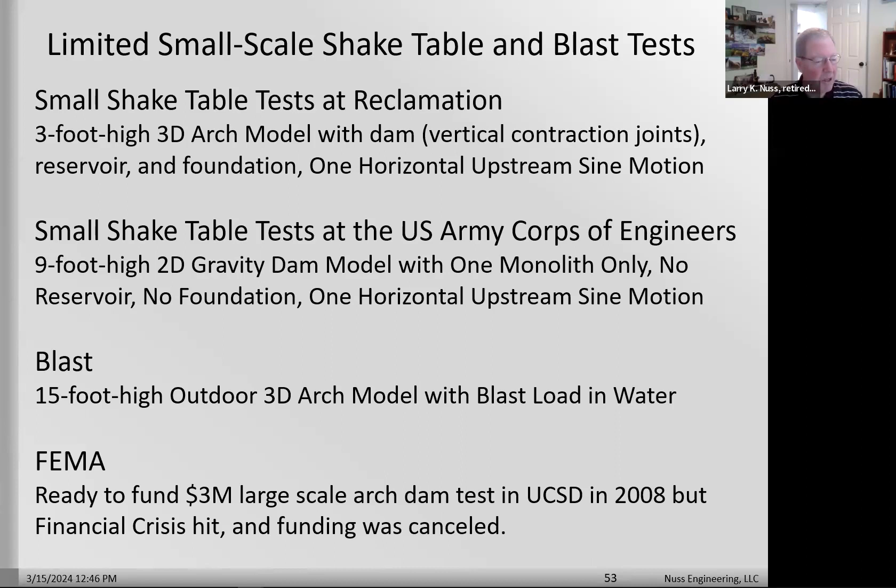Then, in 2008, Reclamation was going to be partners with FEMA and Homeland Security to do a large scale test in San Diego on their shake table. They were going to grant us $3 million to do a large scale test, maybe 15, 20, or 30 feet high, on the shake table. And the week that we were going to announce that we got the funding, the financial crisis hit in the United States, and we lost all the funding. All the funding was pulled from FEMA, and we never really got it back to do it.

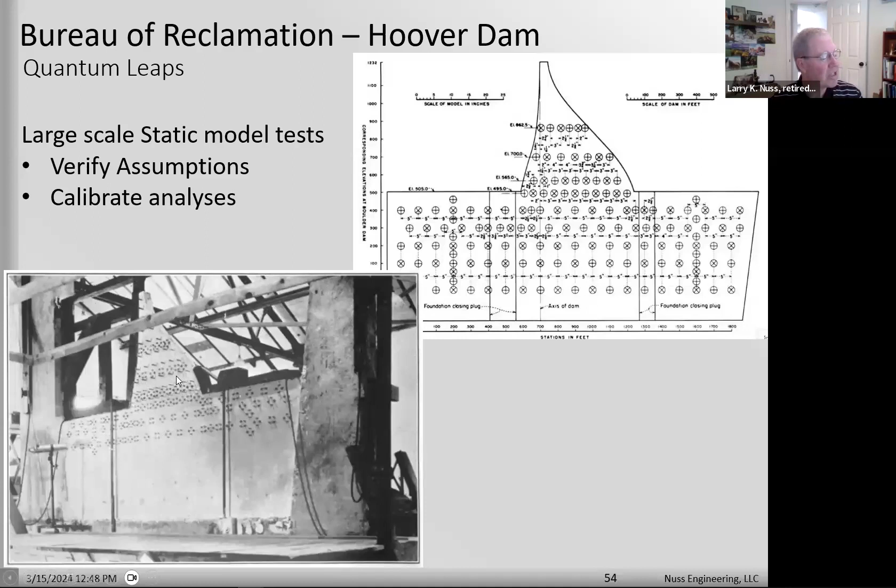So that's too bad. There were static large scale tests done when they were building Hoover, to compare model testing to analysis. Here's a large scale test in the Reclamation lab in Denver with all these strain gauges, and they would load a section of Hoover and see if their analysis matched the stresses.

Here's a large scale test of an arch. They would crack it. They were worried that if they built an arch dam, would it crack through, and how would it perform against a rock abutment? You can see the size here—here's some bookcases against the wall if you look through the arch.

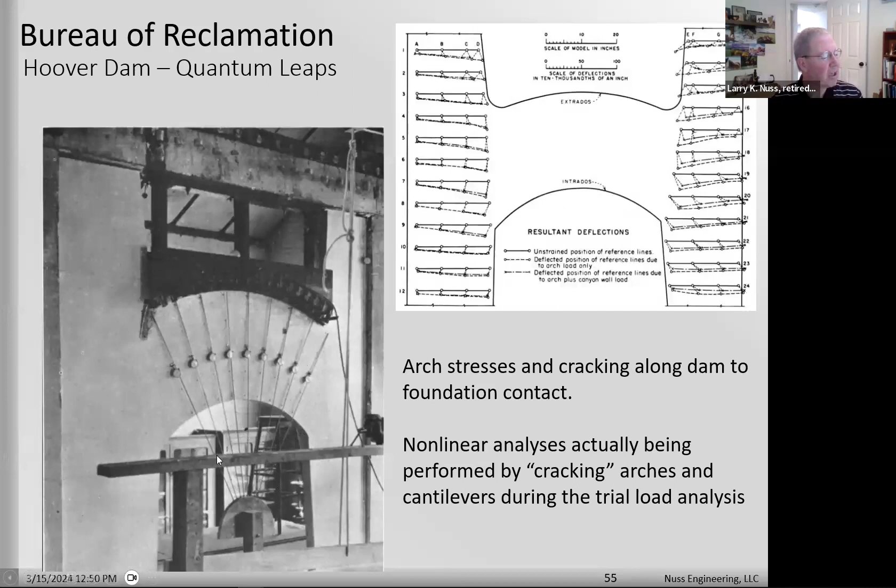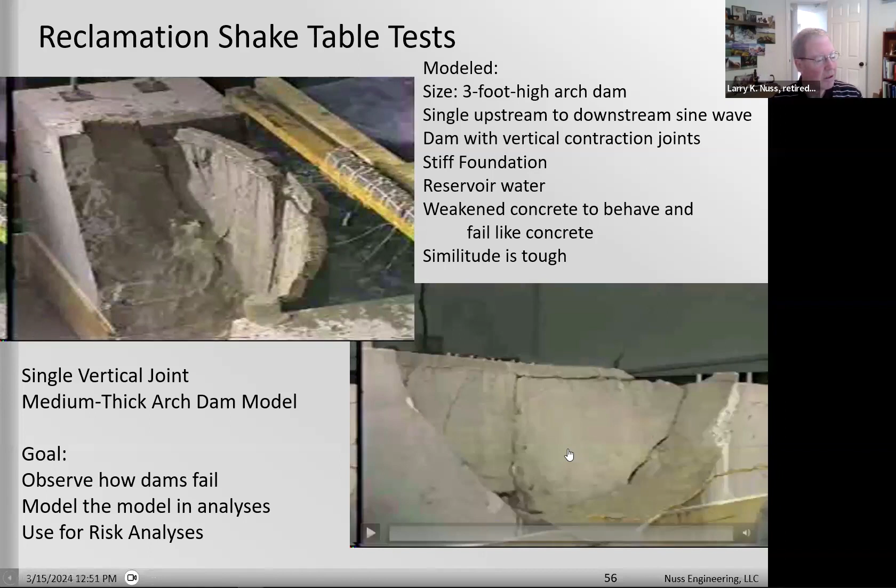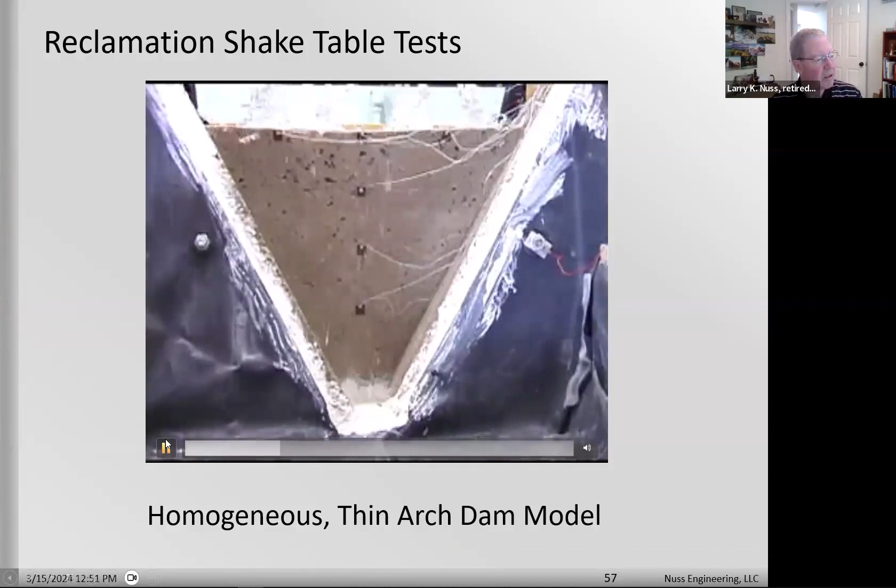And then we did a test of a thin arch dam. So I guess civil engineers get excited with small scale testing. I'll run it again.

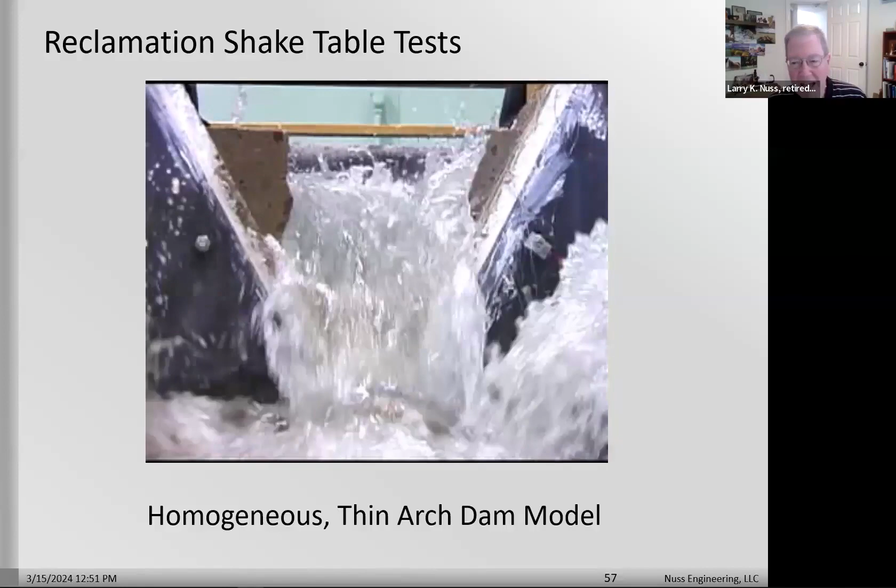Okay, perfect. This is my last slide. Okay. Perfect. So that's it. Thank you.